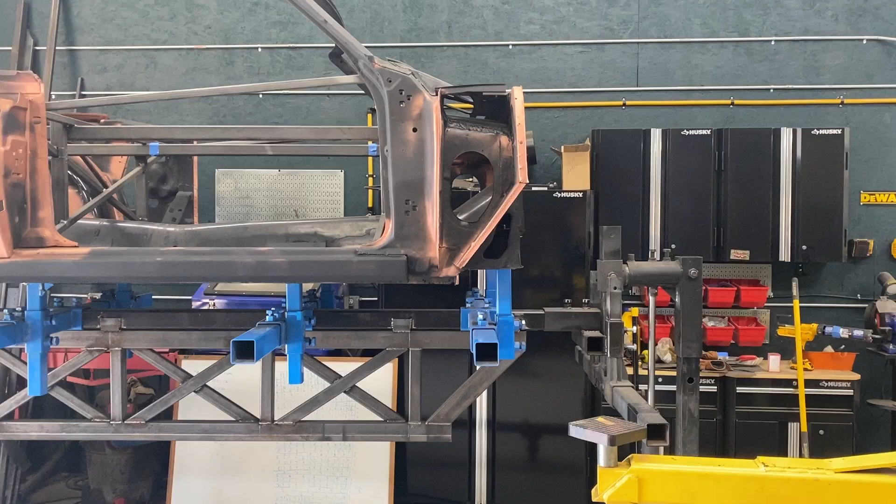All right, good morning. I moved the 67 out of the way this morning because I got another little project going on that I wanted to take care of while the weather was nice today. It's supposed to be crappy the rest of the weekend. This belongs to a friend of mine. His name is Wally, obviously. 55 Chevy Bel Air, two-door post.

Beautiful, beautiful little car. I'll tell you what, this thing is super clean. Very, very well done. Look at that. Just, oh God. This thing has power steering, power brakes. It drives like a new car. It's crazy.

My first car was a 56 Chevy wagon, two-door, that I restored, started working on when I was 15. Some of you may know. Fun project, great car. Had a lot of fun in that thing. But it didn't drive. That had all drum brakes, manual steering, everything this is not. And it's unbelievable how the other half lived. This thing just drives so different. But let me show you what I'm into here.

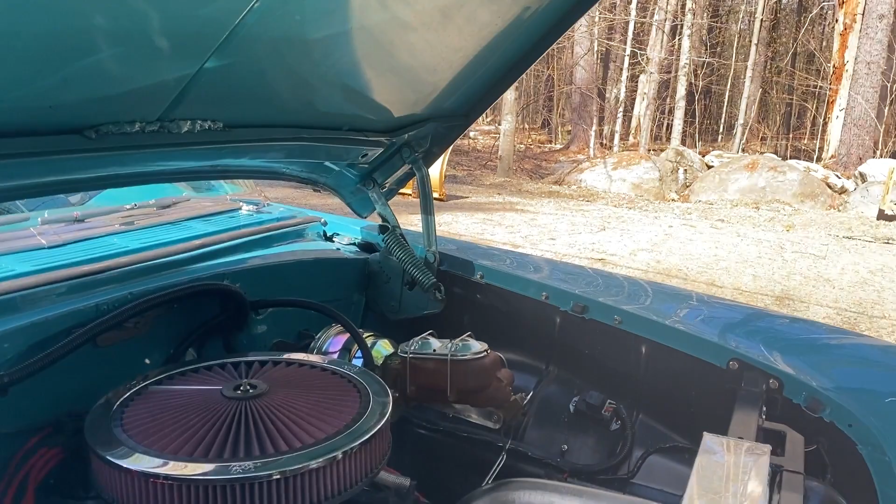So Wally has installed a Sniper 2GC carburetor, fuel injection, throttle body injection, with a Holley Hyperspark distributor setup. It is a really nice little setup, and I've looked around. I have not found much online with this. This is actually a 350 Volvo Penta boat motor, believe it or not. Of course, it doesn't have all the smog attachments and everything else, so for a car like this, it's an ideal fit. Great running little motor, or at least it was.

He's got a Vintage Air kit in it. Just a sweet ride, man. This thing is really good. So what he's asked me to look at was, he put in the throttle body and the Hyperspark, and it ran pretty good for a little while. Then it just went to shit. Loads up, popping, banging, spitting, sputtering. And I've kind of debugged it a little bit, and I'll show you some of the footage on that now.

I got a cable to attach in place of the handheld, hooked my computer up to it, was able to monitor all the signals. And what you see is something very interesting with the O2 sensors. I think what had happened was this was just running way too rich, and it fouled the O2 sensor. I kept messing with it, and it would run great for a few minutes on a good tune. It only had the factory tune, I mean, the box tune from Holley in there, and it was okay, but it was rich.

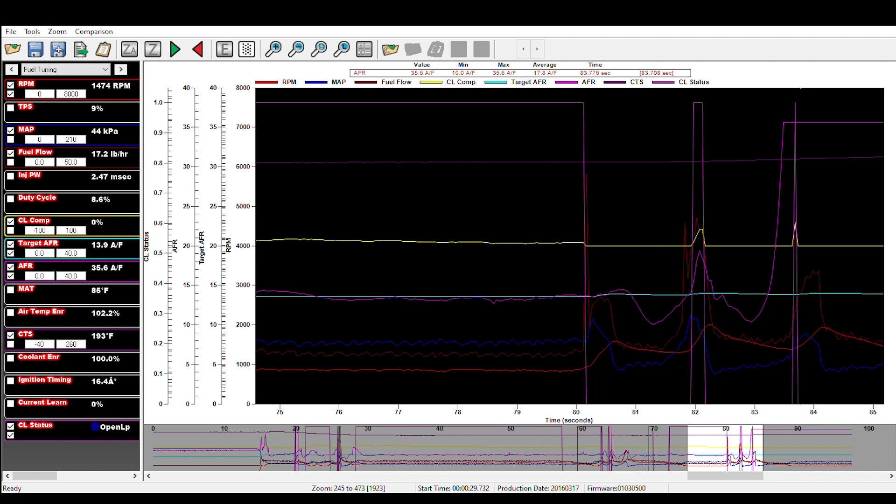But as soon as I started playing with the throttle a little bit, it got warmer, and as soon as it did, it just took off. It just headed for the buckwheat. And as soon as it took off, it comes out of closed loop mode at that point, as you can see here. But at that point, there's just no telling what you're getting, and it's just flooding. It just starts to really flood the system with fuel, and it stumbles, and it just runs really, really poor after that.

So if you see that 35.6, that is a good indication that you've got something really wrong with your O2 sensor. So that was kind of the missing link for me. When I figured that out, I got to a point where something was really wrong here.

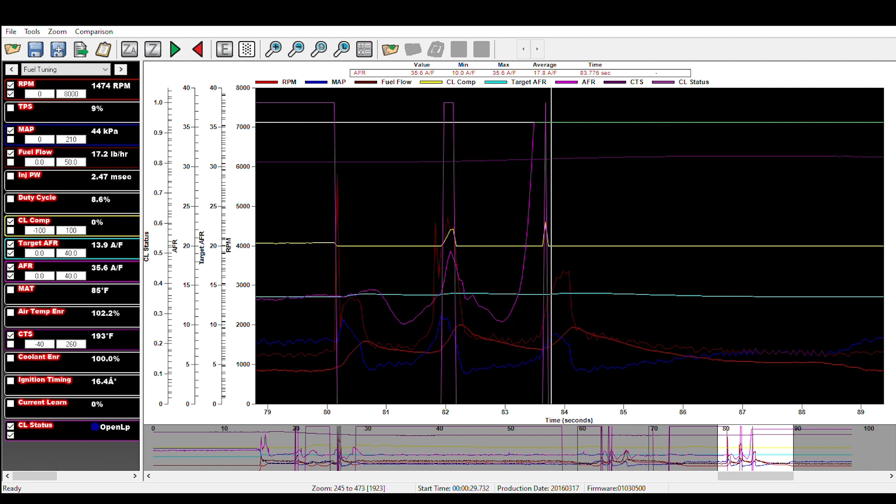Okay, that said, I'm going to put this up on the lift. I am going to swap out that O2 sensor. One other thing we did, it had a 160 thermostat in it. We put in a 195 just because a lot of the tuning values, you set it up so that it starts to tune after 160. Well, if the thermostat's sitting at 160, it can give you some funky results. We couldn't get a 185. We tried, but my recommendation would be running 185 in it if you're running a Sniper setup.

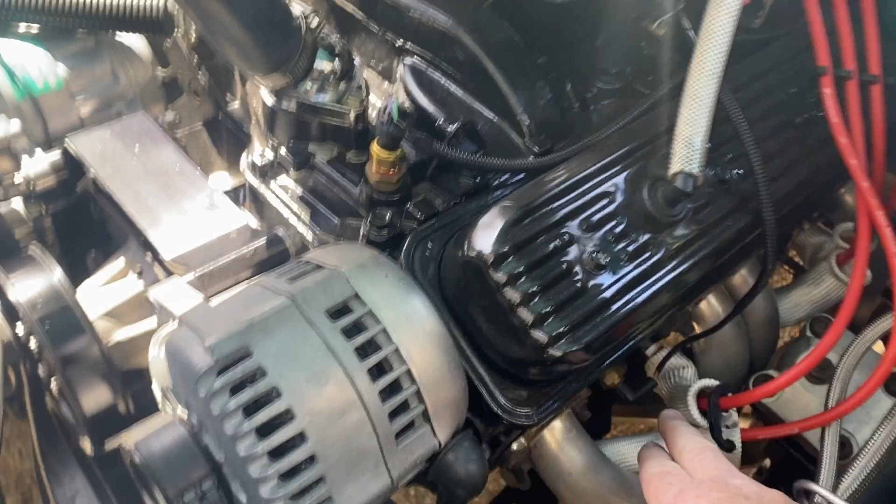It has its own sensor here for water temp, and then there's a sensor in the block down there. Interestingly enough, one thing I noticed with this car, I can't say that I've ever had two water temperature sensors on the same car, but the head temp comes way up long before the water temp rises up by the gooseneck. So, you see it shoot up to 220, 230 on the head before the 195. It hits 195 up here and the thermostat opens.

Once the thermostat opens, everything evens up, and it's very consistent. But that kind of surprised me a little bit. I wasn't really expecting that to be so different from point to point. I don't know why, because that's right down near where the action's happening, right? That's direct heat. So, should be good.

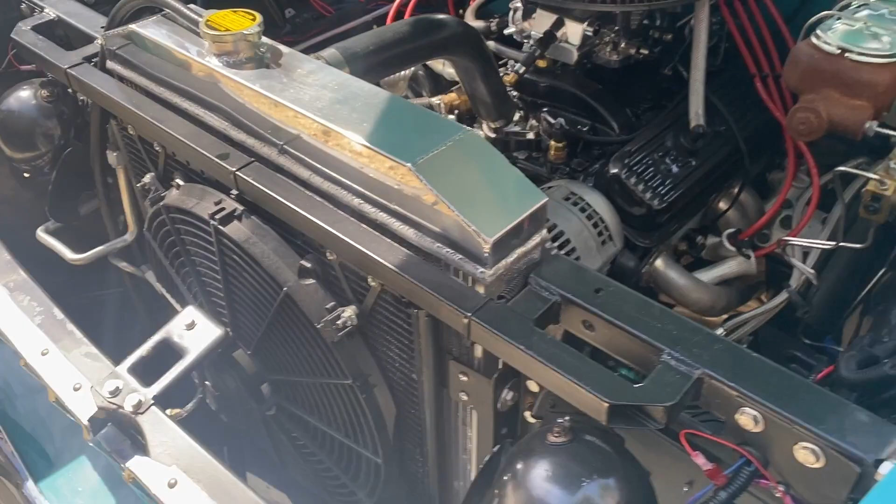A super nice radiator. Look how clean this thing is. And a little 9-inch booster on there. Dual electric fans. This thing runs right on the thermostat all the time. It's just a beautiful little car. He did such a nice job with this.

But all right, so next step, I'm going to roll it in here, get it up on the lift, get that O2 sensor swapped out, get it running, check it on the computer, make sure that one's not doing something funky. Try to lean this thing out just a little bit. All the plugs were very, very dark. Hoping that we can get it to lean out just a hair so that doesn't happen regularly. If we can get it to run right, get it back over to him, let him run it for a bit more.

With these Snipers, especially the 2GC, I'm learning you've got to set up your curves, get everything where you want it, run it, and let it learn a little bit. But the key to letting it learn is that you then have to transfer that learning table over to your base air fuel mixture table. It doesn't do anything unless you transfer it over and then merge the two tables.

So I'll do that. I'll drive it around a little bit, maybe take it out for a ride today, and then come back to it, do the learnings again, let Wally run it for a little while, have him come back over, and we'll transfer the learnings one more time and check some plugs. Wally obviously knows what the hell he's doing on the end of a wrench. So have him check the plugs periodically. It's running really super rich right now, but you've got to go small steps. I don't want to lean this thing out because that'll be worse.

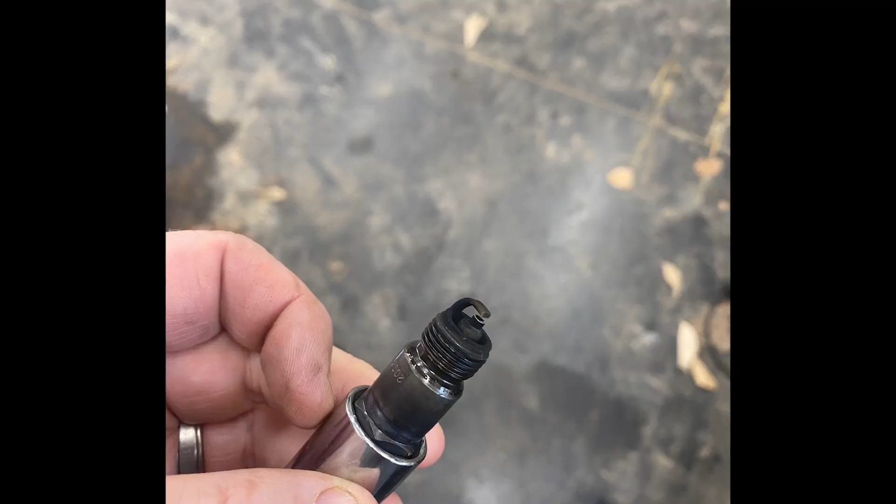When I got it on the lift, I pulled the plugs and replaced them. I noticed some of them were very sooty, and some of them looked extremely washed, just supporting the very rich theory. But what I also noticed underneath was that some joints on the exhaust were not welded properly and were an obvious source of leaks. So I took some time and dropped the exhaust down. I'm going to show you that in a minute. These potential leaks were right forward of the O2 sensor.

So in theory, what was happening is as this thing was starting to leak, it would show the O2 sensor an extremely lean situation, which caused the Sniper to just dump more fuel. And with more fuel, it just got richer, and it was a vicious circle that was out of control. It was a closed loop, but it was feeding off bad information. So that's where we started working next.

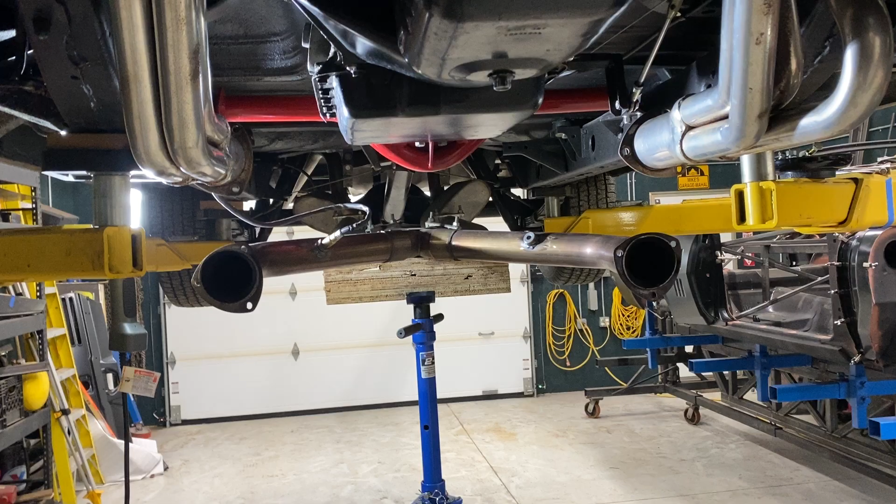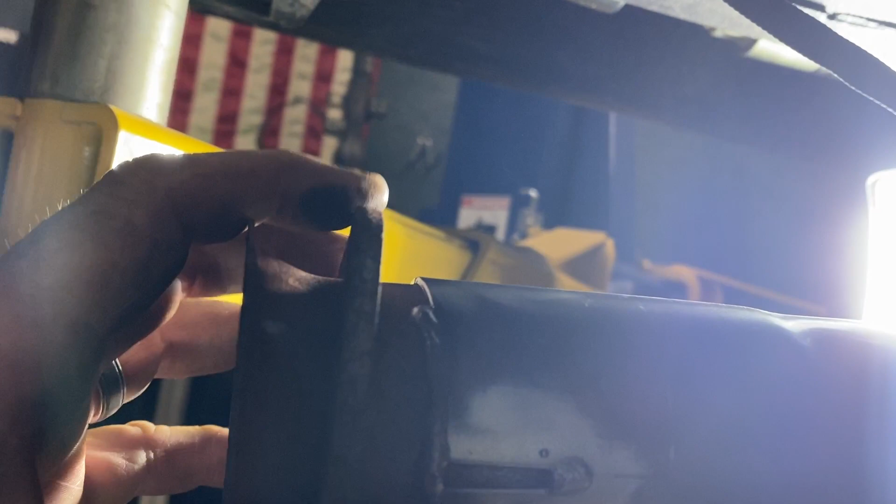Okay, so what we decided to do, I just unhooked the bolts here, and we're going to weld that up. You can see that opening was open there, and it doesn't even go back a 1/4 inch beyond the end of those slits, so I'm pretty confident I've got a leak there. Let's see if I can make this look better for you here. So we dropped it down. Sorry about that.

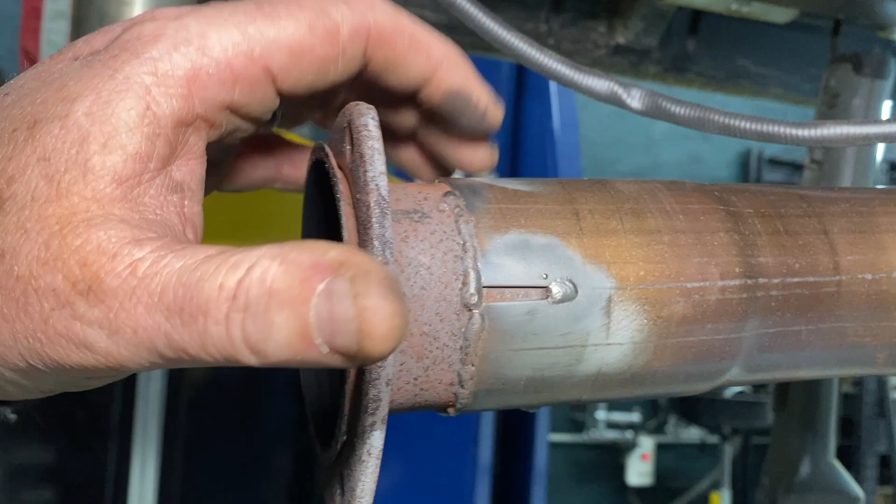Yeah, we dropped it down and took the gaskets out, although they weren't really gaskets. They were some aluminum plate, I've got to figure that out. Anyway, we dropped it down and we're going to weld up those potential leaks. The bungs look welded in beautifully, so I don't see a problem there, but I just took a wire brush and cleaned this up. You can see this wasn't welded for about 1.5 inches up here, so I'm pretty confident that's leaking. I put an exhaust clamp on it and tried it. It was better, but still not quite there. So I figure while we're here, let's sort this out.

Okay, so this is where I ended up. I reached out to my buddy at Rusted Up Garage, check him out, Ricky, and his son Zach. Zach and I connected on this, and Zach really helped me out here. He helped me understand a few basic things. I was really wrapped around the axle on the target AFR number, and he helped me understand that the number is just a number.

I was like, oh, I can't go above 14.7, can't go above the... it's really not like that. That number is a direct reflection of how your system is reading that O2 sensor. So every system is going to be slightly different. So don't get wrapped around the axle on the actual number. And what Zach told me made total sense, and it's exactly what I ended up doing.

Just slowly bump these numbers up, a couple points at a time until you start to notice an ill effect. The motor starts to stumble. It starts to just idle poorly and not run. Just like you were constantly adjusting jets in an old carburetor, just slowly bump these numbers up until you start to notice some ill effects, then bring it back down until it's happy. And then you're pretty much there.

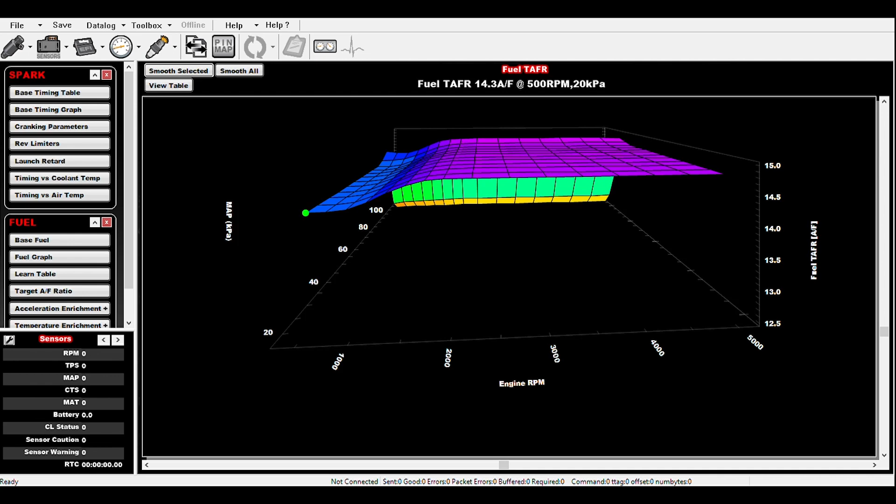It's a little leaner than you would expect if you're just looking at the numbers, but this is where it ran good. And I can show you the graph on this. This is what the graph looks like. It could be a little smoother, and I probably will smooth that out at some point, but right now I've got it reacting and running pretty much like I want it.

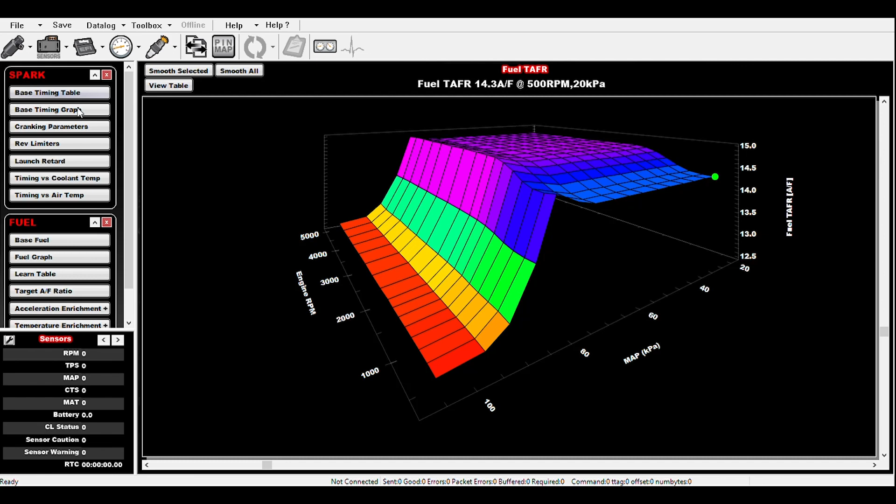The timing on this motor was interesting as well. This motor called for an 8 degrees advance at idle up to a maximum of 30. And that was pretty much a function of the camshaft. Remember, this was originally a Volvo Penta motor, and it had the heads redone, put back on, and it runs great. It makes great horsepower in the power band.

If anything here as well, after running it for a few days and after it gets smoothed out, I might knock that 8 down at 1,000, and at the 1250 number here, start to build it up there. I don't know if I need 30 degrees advance at 3,000. I might move that down a little bit too. I might shift this whole thing down just a hair to get it quicker into the power band.

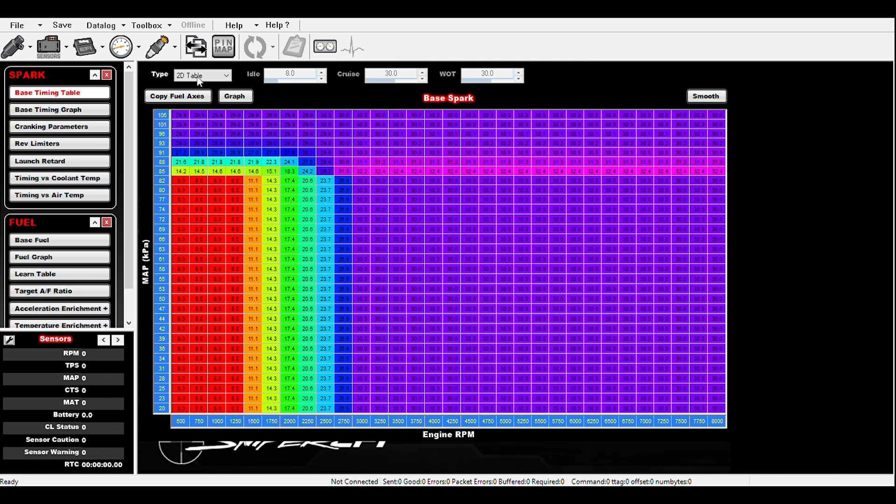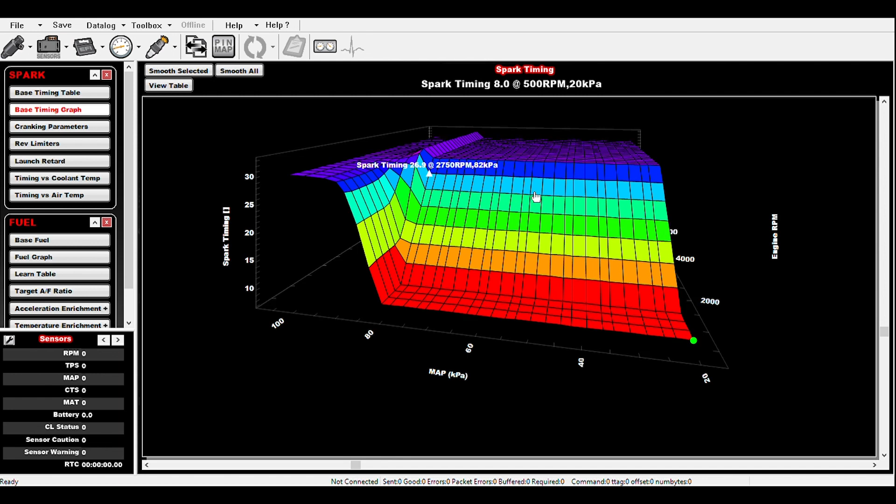I did find that if I went much above 30, 32, 33, I started to get a lot of pinging and spark knocking. So I stopped and went right back to this because that's not going to help anybody either. This is what the timing table ended up looking like. Again, I got that funky little peak in here I could take out, but other than that, it's pretty smooth. I'm not 100% convinced I like where it starts taking off, but I liked where it ended up because at the higher RPMs, the power band felt great.

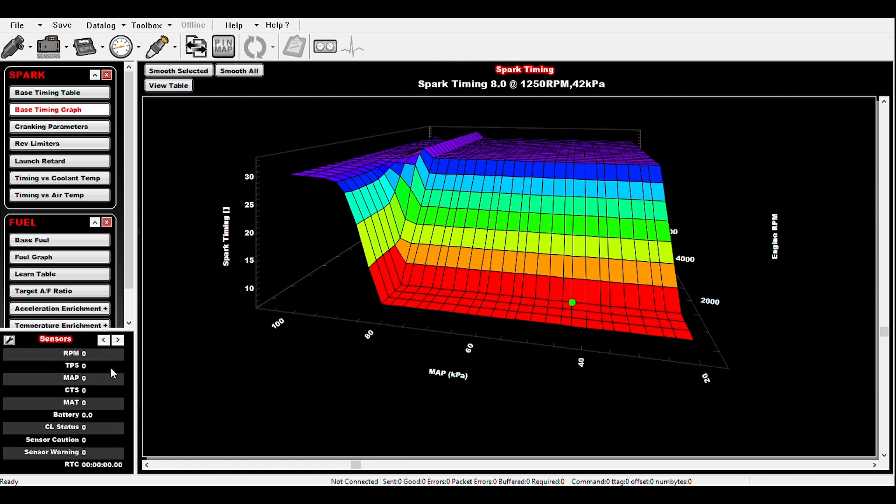Now, here's the fuel graph. This still has some peaks in it, but this was after a couple of learning sessions, and that's what the fuel graph ultimately ended up looking like. So, not unexpected. When I do bring in the learnings, I don't smooth it because I like to see exactly what it's doing and where it's struggling.

You know, the law of averages says it's going to smooth itself out anyway, because it's never going to sit right on those points. It's going to get to those points and come off those points, so those peaks. So it'll work out.

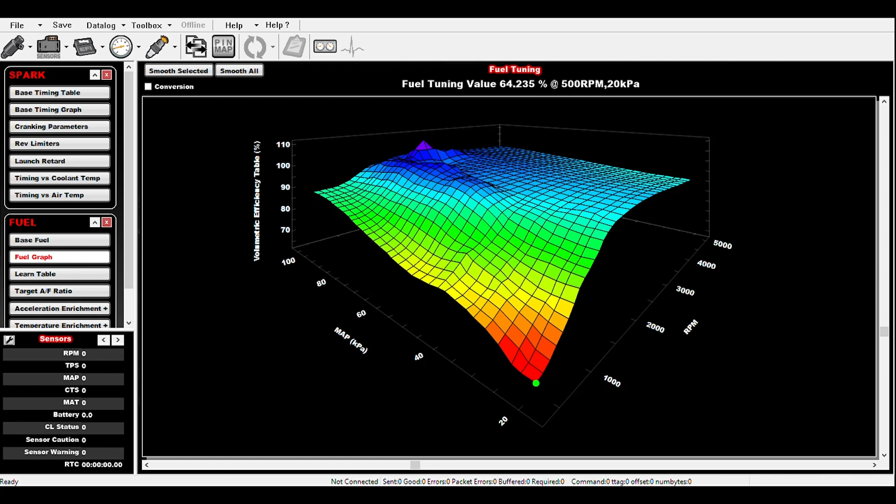So ultimately, I put this in the car, started messing with it, changing timing a little bit, letting it learn, did a few learn cycles on it, kept integrating the learn feature. One thing I struggled with for a little bit is, you get your learn table here. This was just sitting in the garage, so I disregarded that.

But you have to be offline to transfer the learning to base, and then you have to resync it to get it to take. So in other words, you can't just transfer the learning to the base while it's connected and running. You can't transfer that to the live table. You have to go offline, transfer to base, go back online, and send it to the ECU. If you're working dynamically with a laptop in the car, that's where it ultimately ended up.

But to make a very, very long story just a little bit longer, after doing all this, getting some road time on it, getting a few learn cycles into it, it cleaned right up nice. I don't particularly love the way it runs in overdrive, but if you put it in third gear and run it, give it 1,500, 1,600 RPM, it runs super nice. It cruises. So, it's one of those things.

It has a GM 700 transmission in it with a shift kit. But I definitely believe that the overdrive doesn't help this. I'm not tuned well for overdrive right now, is how I would like to put it. I think it runs fine at overdrive. It would go down the highway beautifully at 70, 80 miles an hour, I'm sure. But by the time you put it down in overdrive and you're going down the road at 40 to 50 miles an hour, it's a little logy still.

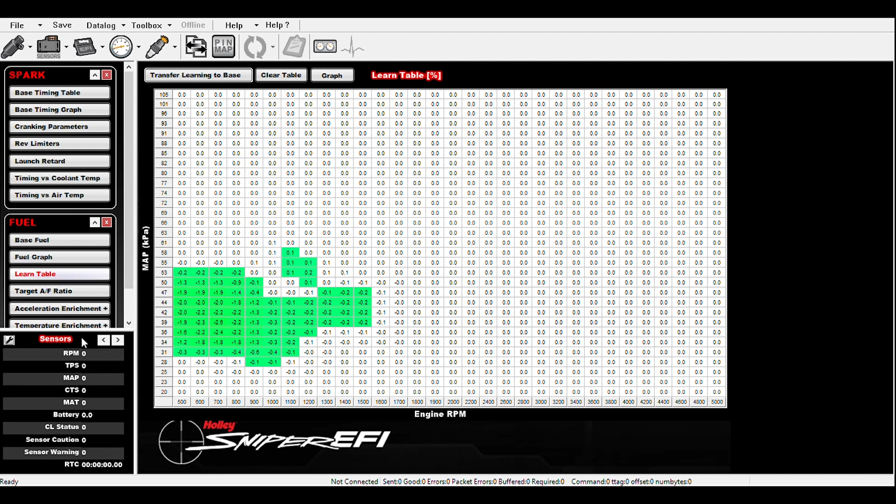But basically, the target ratio was one of the key things. I kept bumping that up a couple points at a time. 0.2, plus 0.2, smoothed it out, plus 0.2, and got it to a point where it started to run a little rough, and even just idling in the garage you could tell it was starting to get a little too fat. Brought it down a few points till it smoothed out again, and that's fairly dynamic. You can do that on the fly right in the garage.

So, you select your points, you left click and just say offset selected, and you can go plus 0.2, minus 0.2, and you can poke around a little bit like that, and it worked great. So this is my first time tuning one of these. I have never done this before. I am definitely a proponent of this system. It works so nice once you get it running right.

It works good. But one thing I will say as a closing comment, getting this thing right really gives you a lot of respect for those engineers that originally built the 2GCs, because all of this is factored into that mechanical carburetor. Between the accelerator pump, the jets, the cam on the accelerator pump, everything had to work in unison to make it perfect. And those things were bulletproof. I mean, those little 2GCs ran great.